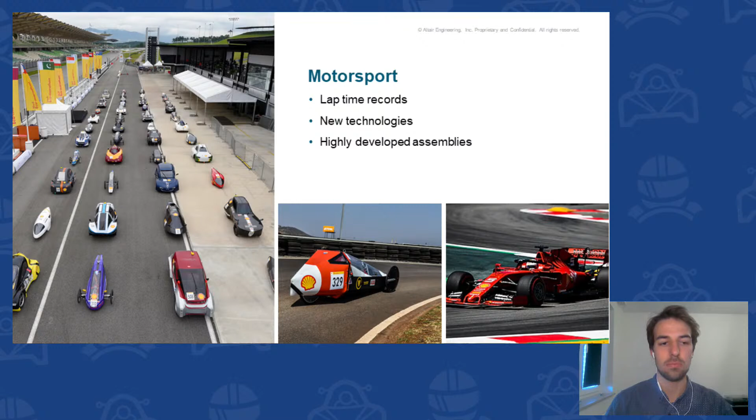The same yields for Shell Eco Marathon. Every year, all the teams compete in events in ultra efficiency classes. Besides the drivetrain, the kinematics, and the software, the external aerodynamic design is an essential part to reach ultra efficiency. Let's break it down. Let's start from the beginning. What is external aerodynamics for automotives?

External automotive aerodynamics directly lead to forces. First of all, the car or vehicle is surrounded by air which flows over it, and this air leads to forces acting on that vehicle.

Drag is a force which acts against the driving direction. It's related directly to fuel consumption, the maximum velocity, and the overall range.

Lift, on the other side, is a force which pushes the vehicle to the ground. It's directly related to driving stability and cornering behavior.

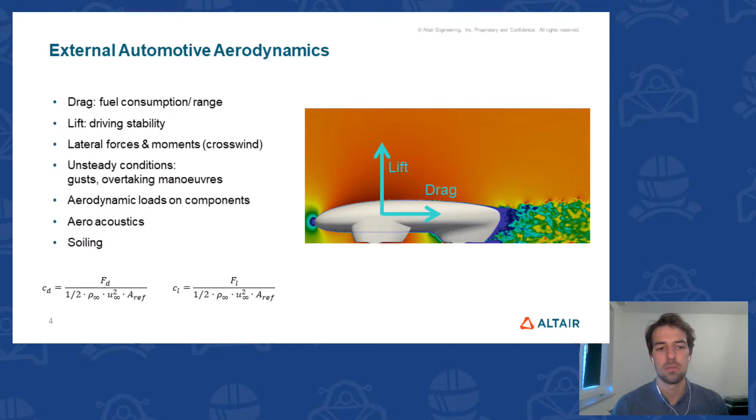40% of the overall drag is gained by proportion and shape of the vehicle, 30% from the wheelhouse and wheels, and 10% is around the internal flow. The underfloor or underbody of the vehicle accounts for 20% of the overall drag.

When it comes to Shell Eco Marathon vehicles, I think the most important factors might be the proportion and shape, and of course the wheels and wheel housing.

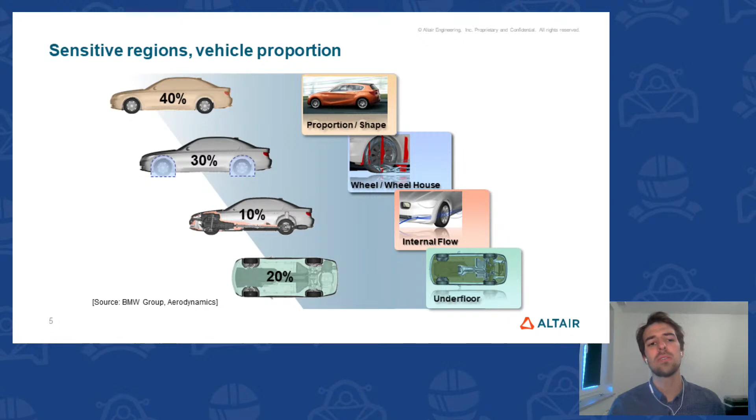But why am I talking all the time about aerodynamics and external aerodynamics? Let's have a look at that.

First of all, EUDC and NEDC stand for emission test cycles motivated by the automotive industry. But that's not the important part. The important part is when you imagine you're driving in the city.

So we're in the first line of the table, and now we're changing the coefficient of drag by 0.01. The fuel consumption changes by about 0.01 liters per 100 kilometers.

The related change in equivalent mass would be about 6 kilograms. Okay, fair enough, not that much.

But now imagine you drive fast, way fast, 120 kilometers an hour, and we change the drag by the same amount. Then the fuel consumption changes by about 0.09 liters per 100 kilometers.

When we relate it to the equivalent mass we gain, it's about 129 kilograms, and I think that's quite a lot.

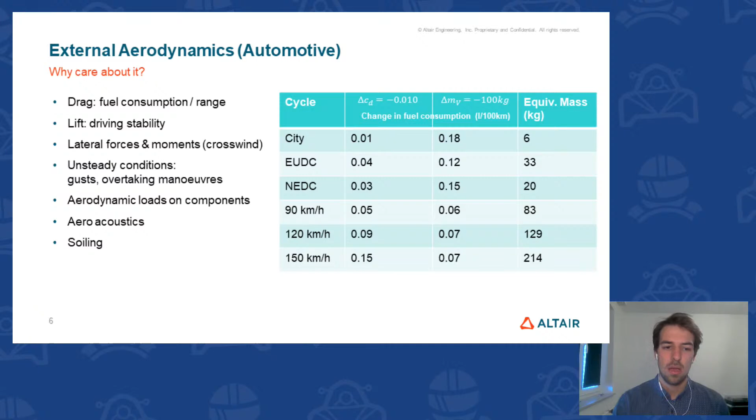Okay, now we've got all this together and motivated. Now the question is how to optimize the aerodynamics of the vehicle.

Optimizing the aerodynamics of the vehicle is quite a difficult task. It requires experiments, theoretical knowledge, experimental data, maybe wind tunnels, and simulations. To achieve an efficient, balanced, and good aerodynamic setup, all of this should be understood well.

Today, my mission is to give you an ultimate insight into lower energy consumption and better performance with optimized aerodynamics. Let's have a look at what this is about in detail.

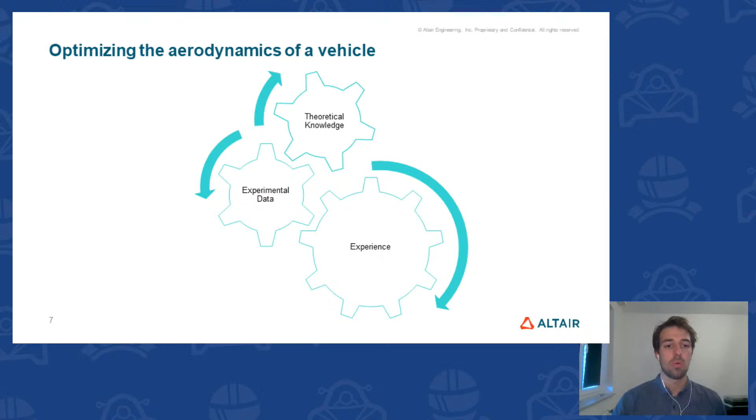Like I already said, optimizing the aerodynamics of vehicles is a difficult task, so we have to take a small look at theory. That's where we start first. I'd like to dive into some basics to get your theoretical knowledge back up and running.

Of course, simulations nowadays are an integral part of vehicle development and thus an integral part of everyday engineering life.

So we'll dive into the practical part afterwards, where I'm going to show you some brilliant software which makes it intuitive to set up a simulation for your own Shell Eco Marathon racer.

At the end, I prepared some results I'd like to show you, and then we'll talk about some common ways to process your simulation efficiently. After this whole session, you should be ready to start with ultra-fast transient simulations.

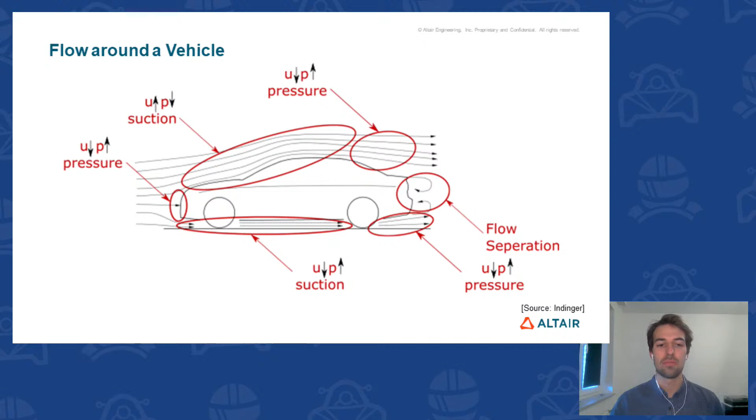The same yields for beneath the car. The air gets pressed through the small gap between the road and the car itself, and the effect of suction also appears. Behind the car it looks way different — there's flow separation, which mainly introduces a lot of drag. But this is only one thing which could introduce a lot of drag. Let's dive into the real reality and have a look at where the drag might be coming from.

The diffuser itself shows nearly no drag at all, because it's a low installation drag device. When we see that all the numbers are placed behind the underbody or underfloor of the car, and remember the numbers from the beginning about how much energy you could save, the question is how to save it — and that's where we come to the underbody of the car. The underbody can be separated into two parts: the ground clearance and pitch, as well as the underbody covers, which determine the flow beneath the car.

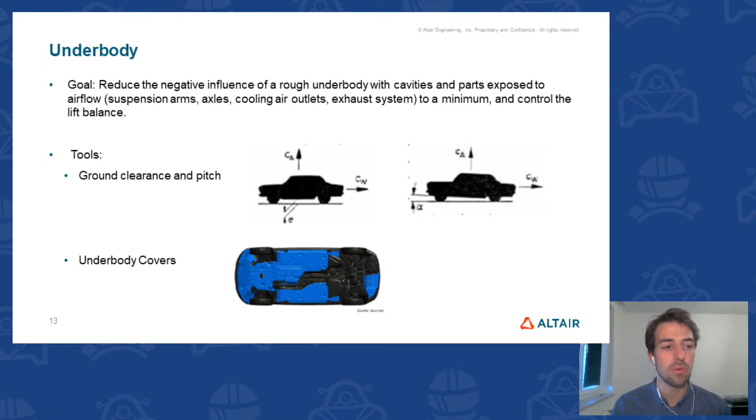Here at Shell Eco Marathon, you don't have that much underbody — the whole car geometry is one in itself. That's why I'd like to speak about a rear diffuser, which may come into account for you. A rear diffuser is one special device, and as I already said, its installation drag is close to zero. This rear diffuser can be built into your body geometry, and a well-designed diffuser can help reduce drag and also lift. In general, longer diffusers are more efficient, but they only work well if you have undisturbed upstream flow, as found on many Shell Eco Marathon vehicles, so that's quite good. You should definitely have a look into this.

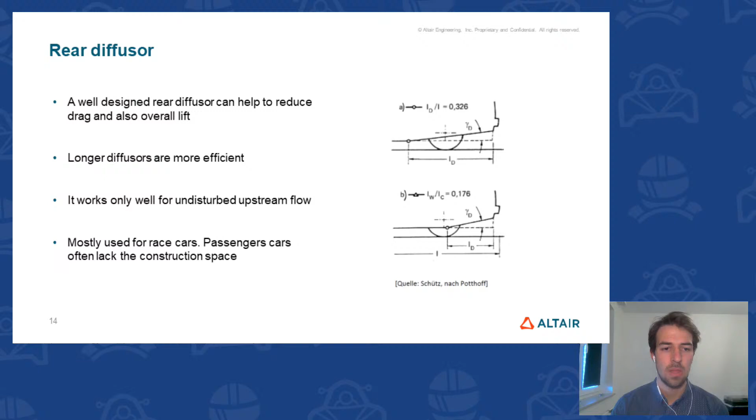Another big thing are probably the wheels. When speaking about Shell Eco Marathon vehicles and looking at pictures, the wheels are quite obvious, and the wheel is super important as well. There's a superposition of flow around the car and flow around the wheels, leading to a complex flow in itself. When we drive forward and add wheel rotation, we add additional effects, so that altogether 30% of the car's total drag is caused by the wheels or the wheelhouse.

So where to attack, what to change? The tire and rim size could be altered. Maybe a closed wheel setup is more suitable to achieve lower drag numbers instead of an open one. Do experiments and run simulations to really achieve a good setup for your wheel placements.

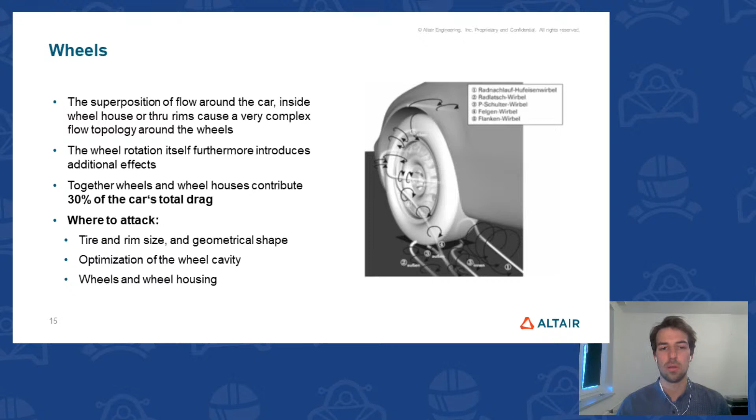Besides this, we also need a little bit more external aerodynamic parts to get the vehicle running. The last point is to speak about inlets and outlets of your internal flow, how to design them. Especially interesting when it comes to cooling your fuel cells, batteries, or even engines. A proper design can save a lot. By using the local momentum added in the radiator or in the outflow, it might even be possible to reduce the installation drag close to zero of these inlets and outlets.

So that's really interesting. Let's look at one example here. On the right, I showed some typical car sketches and some bar diagrams. Version A shows a classical passenger car. We have high drag, you see down the bar diagram, and a good mass flow. The air is entering right in driving direction, against driving direction.

And for example, in figure C, we're using the pressure regions to support the flow. So we gain a lower drag and the mass flow is nearly the same. What I really like to point out here is that inlet and exit with the face in normal stream direction does not necessarily include low drag values. So be creative and experiment, and use the local flow field to really get a good result.

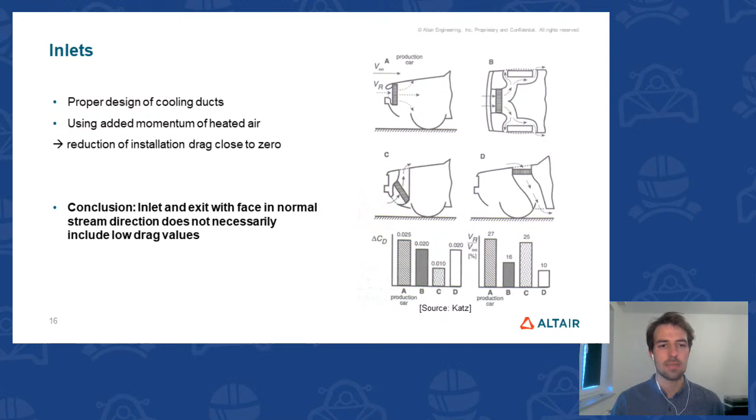As I said, interesting is also the point when it comes to the outlets, the exhausts. The same importance yields for them. Generally, they should be placed in low or good pressure areas as well. But attention here on the outlets: when you have an outlet, you increase the local boundary layer thickness and therefore the likelihood of flow separation on the surface attached to it. And as we already had, flow separation means more drag.

Let's dive into some examples as well. On the right, again, you see some sketches I put on here, not diagrams this time, it's more sketches. In A, you see a conical sheet metal, just a simple exhaust for maybe your battery cooling. The influence on pressure and drag is, I would say, normal, and it's a good workaround. But there is a better way to do it.

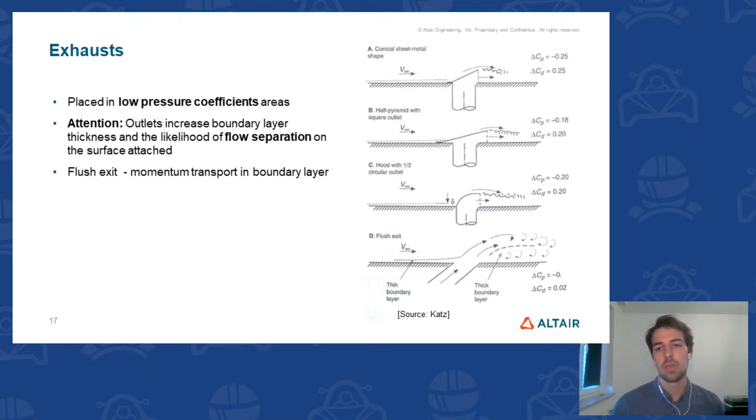For example, with version D. Version D shows a flush exit, which has way smaller influence. So it's nearly no influence in pressure and less influence in drag. And if you place it right, you can even use the fact that it improves momentum transport to the boundary layer. This is how the reality looks like, and due to that we got that roll up now.

Now it's interesting, and there's a question: how does it look when it comes to simulation? And why should we use simulation at all? And what are the common methods? These are my questions you ask yourself now. And to motivate it, I just put up some numbers here.

So why should you use simulation? First of all, money. Of course, the wind tunnel is expensive, the prototype is expensive, the automotive industry spends a lot on these experiments, and therefore computational fluid dynamics would be a good alternative. But for you as a student team, a big point as well is there's no wind tunnel at all. Or better to say, some of you who may have one, they can't use it all the time to really have a dynamic iteration process. So computational fluid dynamics is a flexible and fast alternative to wind tunnel experiments, and CFD offers almost unlimited possibility for the analysis of the flow field.

You can just do it at a computer, zoom around and have the pressure values at a totally different location. In the wind tunnel, that's not possible. If you set up the experiment like this and then you think about having a different number or scalar noted or recorded, now it's gone. So that opportunity you always have using the computer. Coupled with the computing power of today's computers, CFD makes it possible to develop complex aerodynamic components and further increase the performance of the vehicle without building and testing every design option in the wind tunnel.

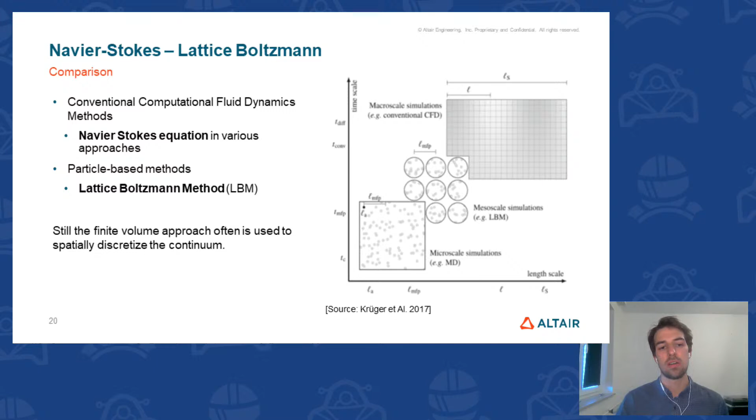In both the Lattice-Boltzmann and Navier-Stokes approaches, we often use a finite volume method to spatially discretize the continuum. If we now take the comparison from the theoretical view to a practical one, there are some more advantages which come into account.

In the direct comparison of the methods, both can be used to describe aerodynamics, so there is no difference at all there. But there's still a lot to point out.

The Lattice-Boltzmann method is transient and explicit. The Navier-Stokes is implicit and mostly steady state. Because the Lattice-Boltzmann method is transient, we have way more accuracy and it's possible to design aerodynamics more exactly, especially when it comes to high-end efficiency. It's even possible to look at aeroacoustic fluctuations in that continuum.

In Navier-Stokes, when it comes to steady state, all transient information is averaged and summed up into one single frame or shot of time. So it's not even possible to capture all effects, for example the wakes around the tire, which we saw in the slides before.

This is maybe a big advantage of Lattice-Boltzmann when it comes to mesh. Down here you have some mesh examples shown. The surface mesh for Lattice-Boltzmann has really low requirements - it's quite simple and not as detailed as the high-quality trias mesh, where around the edges in Navier-Stokes we have small tria elements with a much less skewed angle, and the quality is much higher.

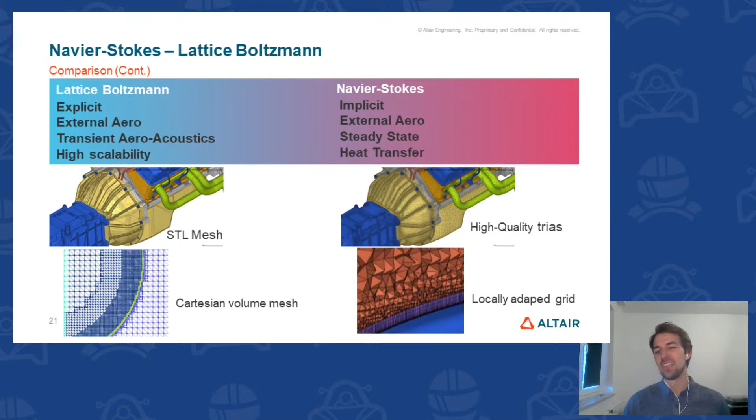Now you're probably all asking yourselves, what really is this Lattice-Boltzmann method? Let's jump into some details.

So we have one equation, the Boltzmann equation. It is solved on a discrete lattice. The lattice is constructed out of voxels, like that one on the right - these small voxels or cubes.

The solving process is separated into 2 steps: the streaming step and the collision step. In the streaming step, the particles stream in their determined direction. In the collision step, the particles collide.

New velocities get computed, and possible particle velocities are discretized into these 19 directions - so we don't allow any velocity, only these 19. This is the step where we discretize.

This D3Q19 velocity set means we have 3 dimensions and 19 velocities for the particles to stream at. Due to this discretization, we keep the transient nature of the flow inherently respected, and the physics behavior is determined still only by the viscosity of the fluid.

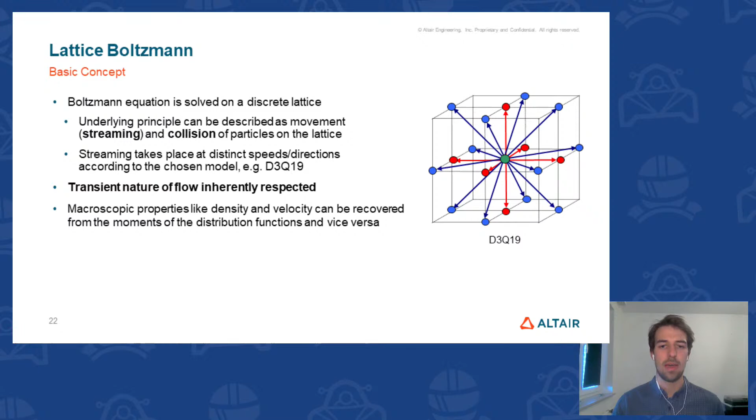Just to round this up, let's have a small look at the iteration process itself, and then I'll leave you to the more practical things as we end the theoretical lecture.

The Boltzmann equation sets the relation between the density of particles and equilibrium density. In the collision step, which we already covered, the discrete velocities get determined. In the streaming step, they stream, and the Boltzmann equation brings that into account. Based on the equation, we can determine macroscopic moments like velocity or density directly. So the solutions covered by the Navier-Stokes equation are also directly solved here in the lattice Boltzmann equation.

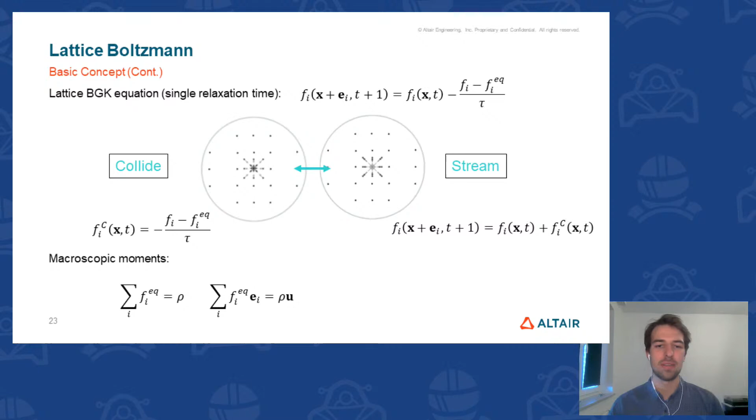Let's sum it all up. We got low surface mesh requirements, trivial volume meshing, and we can do transient simulation, which should be even more interesting in regard to high efficient external aerodynamics.

Tailor-made tools should be used to follow this kind of simulation pipeline, which is always in this general way. The preparation process is first, where we prepare the surface, and that we will do in Inspire Studio. The pre-processing, the setup of the simulation, we do in Virtual Wind Tunnel. The solving in UltraFluidX, and the last, the post-processing of the results, in AcuFieldView.

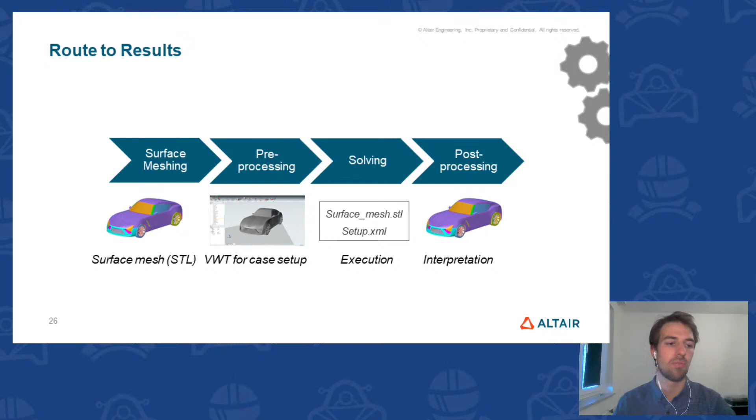Now you ask, what are these softwares all about? Inspire Studio is a software where we can go from design to manufacture all in one single easy-to-use platform. It's intuitive and easy to learn, with a nice user interface and unlimited construction history. We have free-form shapes, which I really like, especially when it comes to aerodynamics and streamlined contours, which are not as simple as rectangular shapes and circles. There we have continuous NURBS geometry, where we can easily work and adjust every small part. We have a sketching environment to create and edit 2D curves, and we can discretize these surfaces, which then leads to a smooth transition to Virtual Wind Tunnel.

Virtual Wind Tunnel is the pre-processing step. It's a vertical application tailored for external aerodynamic studies, designed with the user's needs in mind. The graphical user interface provides easy access to problem definition and solution strategies, and is built up in a kind of streamlined workflow. We have automated and customizable report generation, so that after every simulation run it provides a consistent method for design evaluation. From Virtual Wind Tunnel, we directly export the XML file to UltraFluidX, where we then run the simulation.

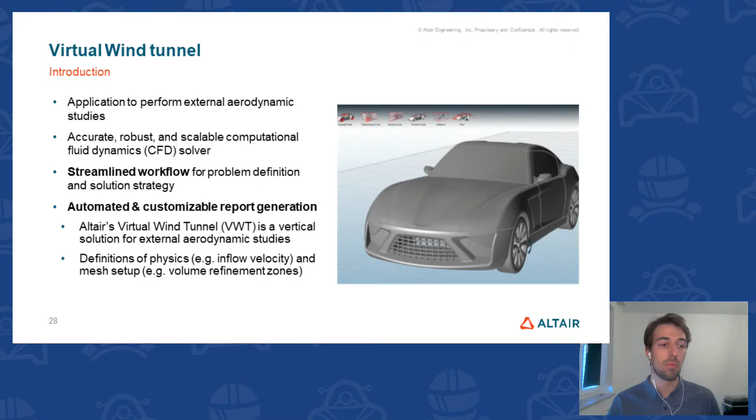UltraFluidX is the main heart, or the main part, of this whole simulation pipeline. The tool predicts the aerodynamic properties. This technology is based on the lattice-Boltzmann method, which allows transient simulation and ultra-fast transient simulation results, leading to super nice turnaround times so you can adapt to every design change immediately. It's optimized for GPUs, you heard right, GPUs, to deliver extreme performance and gain a lot of potential.

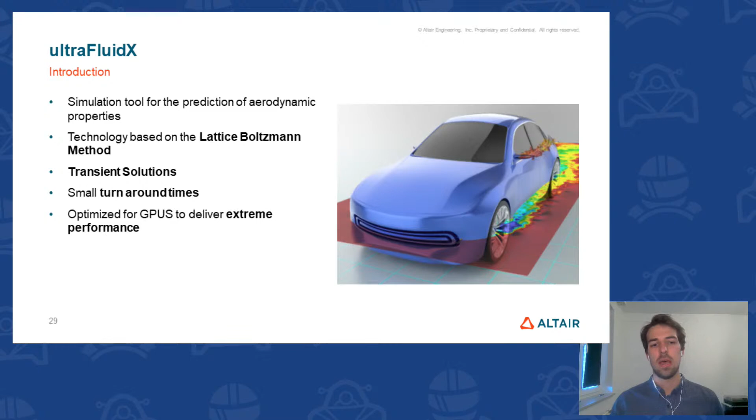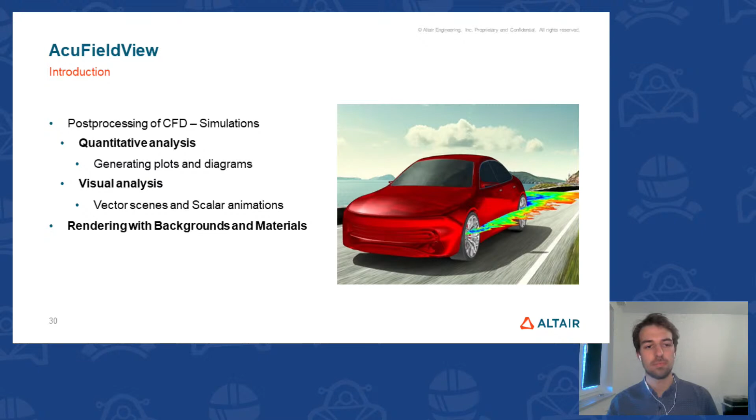The post-processing we do in AcuFieldView. We can either do quantitative results by generating plots, diagrams, and having a look at the boundary layer, or visual analysis like vector scenes and scalar animations. And of course, the fun part is not short either—there are renderings as well, where we can apply materials and backgrounds and get nice pictures like here on the right. But let's have a look at how this really works in detail.

Right here, now you should see my screen closely. I've prepared a nice body geometry which was sent in by TERA Fennek, the Shell Eco Marathon team from TU Graz, who were so kind as to send it in for demonstration. First of all, I'd like to take you into the program, how it's structured, and how the main control works.

So if we click the mouse wheel, we can rotate around the center of gravity. If we move it, or want to translate the image or the object, we can use the right mouse button. To select anything, we just use the normal left one. Up here you have the sketching mode, where you have a lot of things to do.

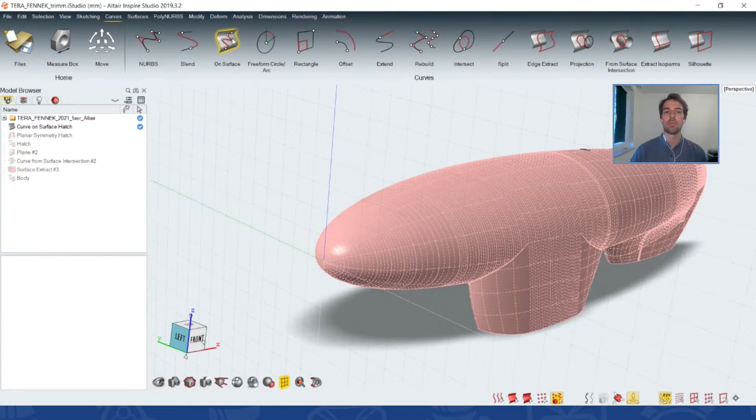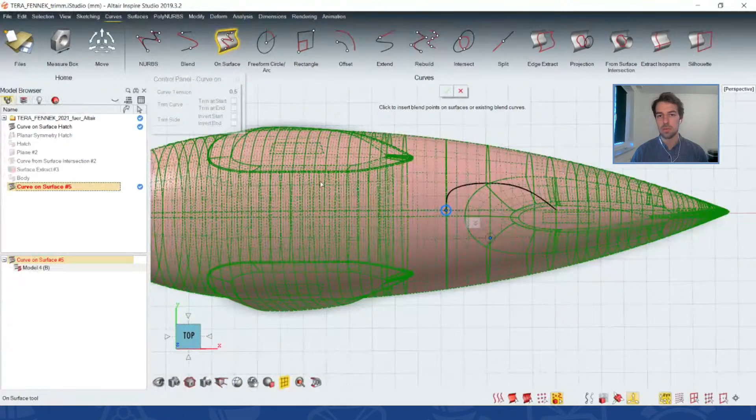Starting from this one, maybe to make it a little bit easier, we may want to create a hatch where the driver should be able to have his head in, so he doesn't have to lay down the whole time. Right now the driver lays here, but to see the road a little bit clearer, it might be interesting to have a hatch or lookout so the driver gets more control.

So let's do this. We have one curve already initialized up here. Now we need to modify it to get it to a really 3D model. We click on modify up here, and now we can scroll through here and look for the symbols, and there we find symmetry. That's what we need.

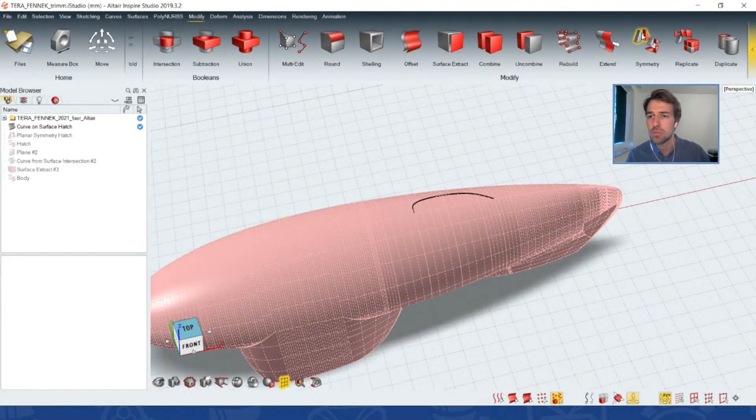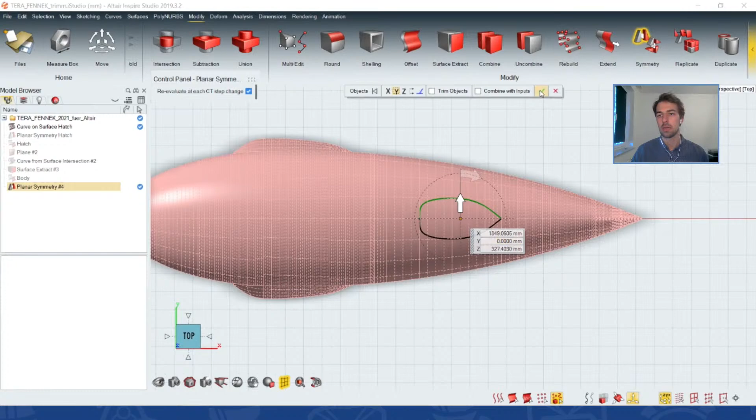We'd like to mirror that curve on the Y plane. Now, when we just have a look from top, you see it's on the wrong way. So we click here on the blue point, and now we can enter the coordinates where the symmetry plane should be placed. We'd like to have Y0. Easy it goes, there we are. Okay, done. We symmetried the curve.

Now we have, I would say, a contour where we could start to create the hatch from. It's a little bit streamlined already in the back, which allows the air maybe to go around a little bit smoother.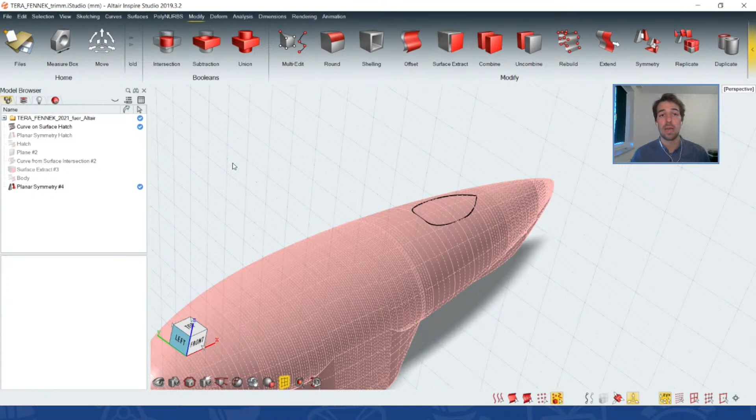Okay, now we'd like to extrude that one. Therefore, we can go on surfaces and then on extrude. Oh, now we already see some popping up. I zoom in here quickly to just the curve. Okay, we click that - oh, doesn't work. We do it in here. You easily can do it also in this side here, because then you have a little bit more control, and you don't have to deselect the parts again when you are in the wrong part.

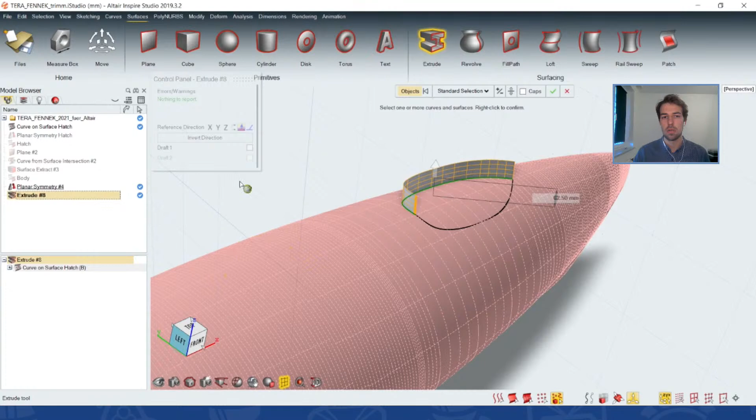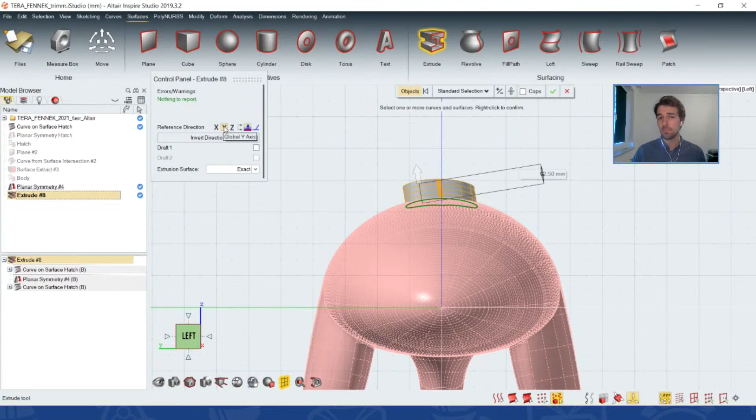Now I select the other one as well. There we are. When we now look from the front, you see it's not even, it's not symmetric to the y-axis, and this is because we didn't select a reference direction. So I think they make it normal to the surface in the first place, but now we can easily correct it by clicking Y.

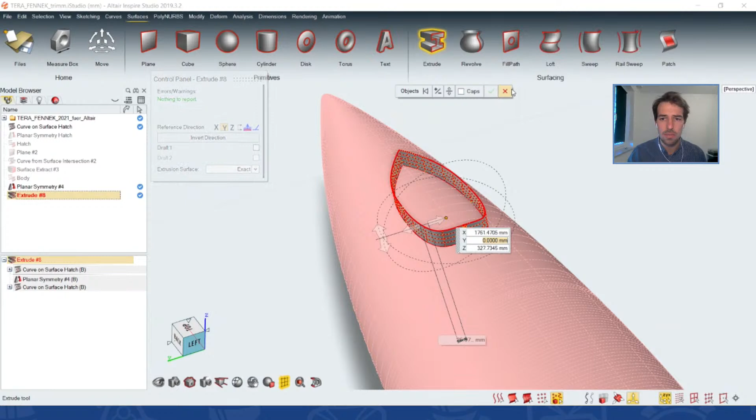Or just move that point further down here. Now we got this one. There we have the Y, which we can set to 0. And now we are, what we've selected here - oh, we have something else selected, I see. Let's do this one again.

We go from here, click on extrude, click these files. Now I got them. Okay, that was the reason why - because I selected already a geometry from that example model. We'd like to extrude the surface. Now we got it there, and this one we got it as well.

Great. Now still we have the problem that it's not really in the right direction. Now we can move it easily, turning backwards, and then get it controlled. I already prepared that, so let's have a look into how it should look like.

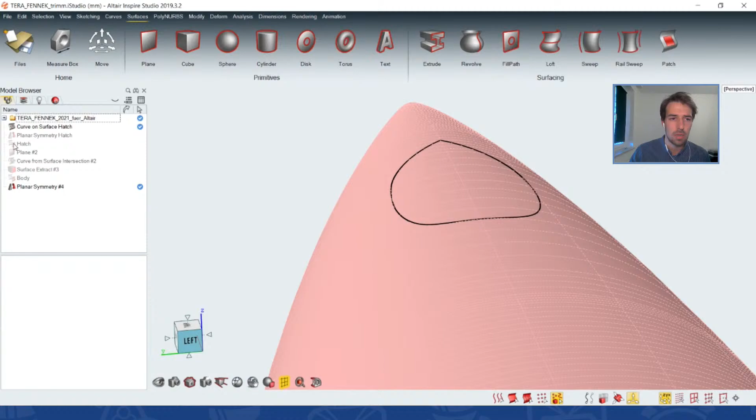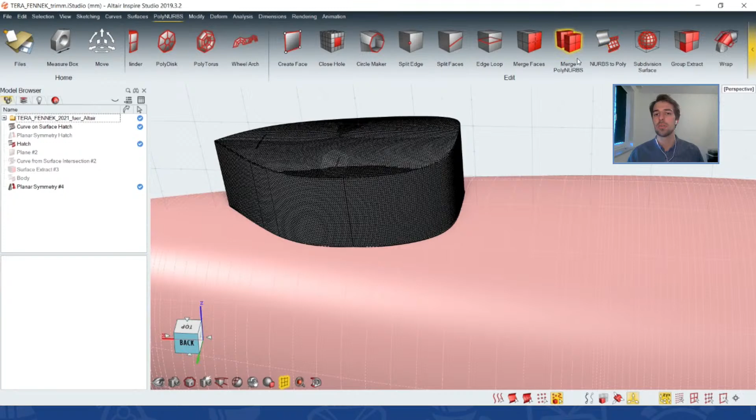Here's the hatch. And what I've already done as well is to mesh it, to generate from the poly NURBS a mesh from this one. Therefore you click on poly NURBS and go on the NURBS to poly option to create this mesh. There you also have the possibility to choose a tessellation and all this. And then you easily end the session and click on Save As to export the model.

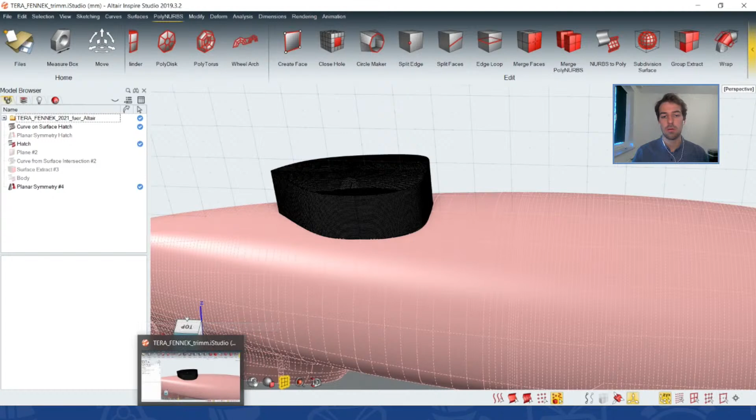Then we go from the pre-processing step, or from the preparation step, to the step where we set up the simulation. Here I just took the original model again and loaded it into the virtual wind tunnel with this import option. The controls in here are the same as in Altair software, and it's quite common to familiarize with them, because it's really just these three options: rotating it with the mouse wheel, right click for translation, and left click for selecting.

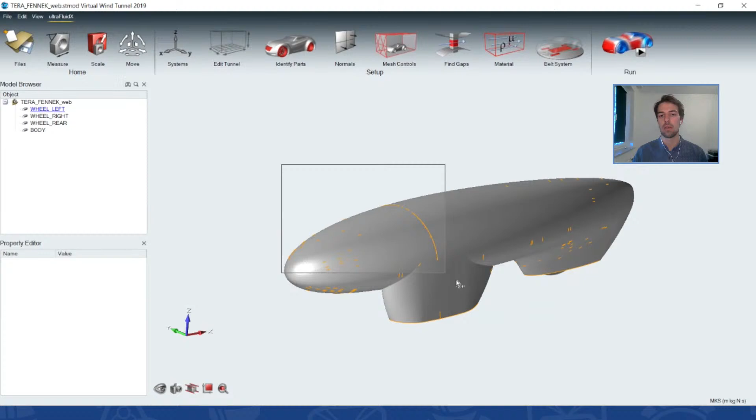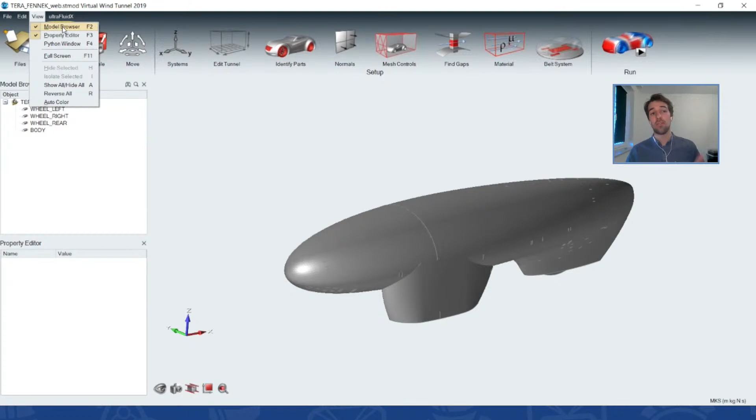Up here you have now the streamlined workflow I showed. So first, maybe here are some measurements and scale options to move the object and interact, and here are the options offered by the virtual wind tunnel. First, I'd like to point out that it's really nice to have the model browser activated and the property editor as well. This shows us an overview of all parts and the properties of the parts when we assign them. Let's start with editing the wind tunnel.

Now you already see that the virtual wind tunnel has already generated a nice and comfy wind tunnel for that object.

First of all, I like to set the inflow condition. In this case, I like to have it at 40 kilometers per hour. I don't know how much this is in meters per second right now, so I just enter it like this. No problem, the software directly transfers this kilometer per hour value into meters per second SI unit, which we choose down here. You could also alter it to different other things if you're in an imperial system, something is just adapting.

Now we like to check the dimensions of the wind tunnel. We could change it here, but I think they are all right for us now. Okay, wind tunnel in place. If we like to move the car a little bit backwards, we could just use the move option, but I think this looks good in regards to distance to the inlet.

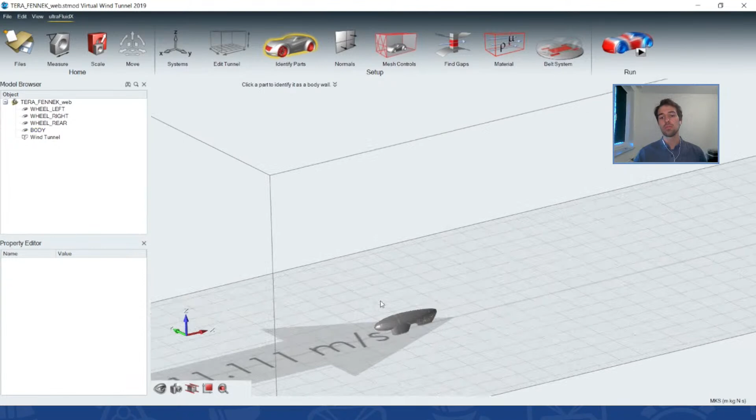Now it's time to identify parts so Ultra knows what really matters, and what is the part and what's maybe a wheel or something else. Therefore, we just click Identify Body. Body, that's one, okay done. Now I unblend the wind tunnel, which you can do here by just clicking on this icon.

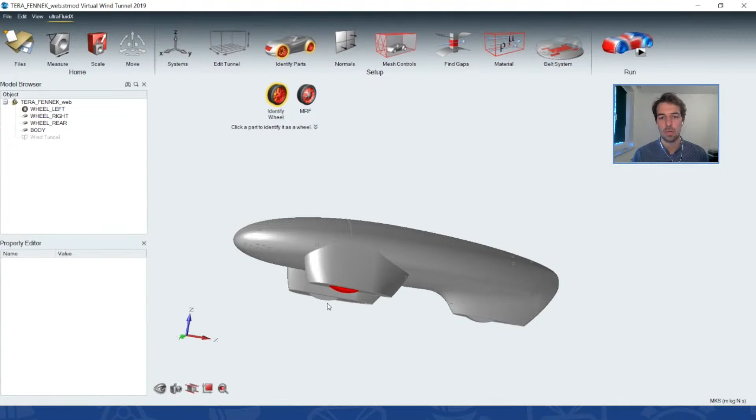Now we like to identify the tires. So we click on Identify Wheel, and now we click on the wheel. They pop up in red, and as well you recognize, right, the symbol here changes as well. And when I go through them, they now light up a little. Okay, going back to a good view.

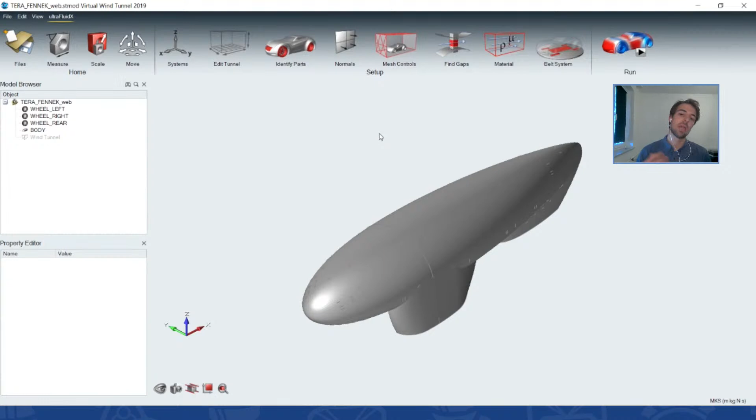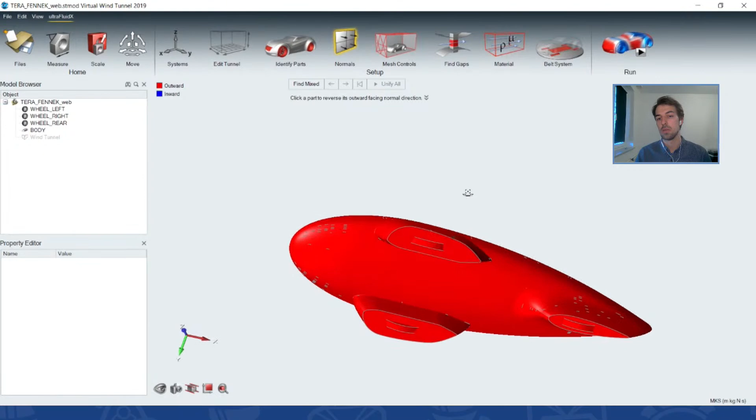It's also important to make sure that the normals point outwards, because Ultra is determined on this normal information. It determines where the fluid should be, whether outwards the geometry or inwards the geometry. Therefore, just click normals. Normally, all the parts should light up in the color which belongs to the normal direction, but if not, you can just select the parts by using the mouse tool I have here. We see already that we have all outward-turned normals, so we're good and ready to go. The wheels as well, as you see here.

Okay, the pure simulation is set up. Let's put it back in the wind tunnel. We could run this now. The thing is that we now have a unified mesh. We have the same voxel size everywhere.

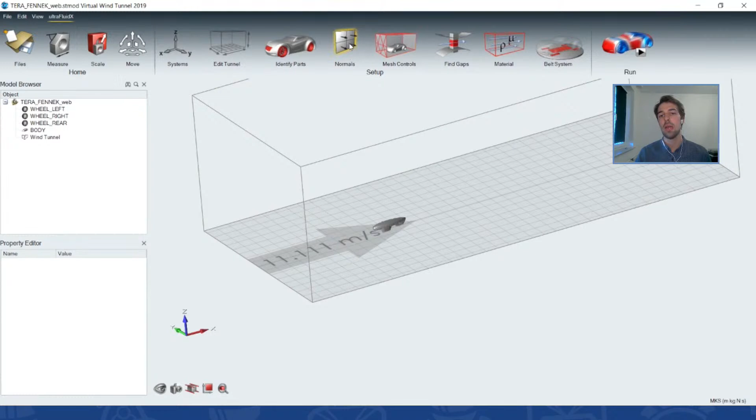To have a little bit more of an adaptive one, we could use some more mesh controls. The far field voxel size, the one in the wind tunnel, is listed here. It's at 0.2 meters, which I think is quite a good value to start with and to have a look. The other things you can put here would be a rectangular box refinement, offset refinement, or even a custom refinement when it comes to tires, mirrors, or everything else.

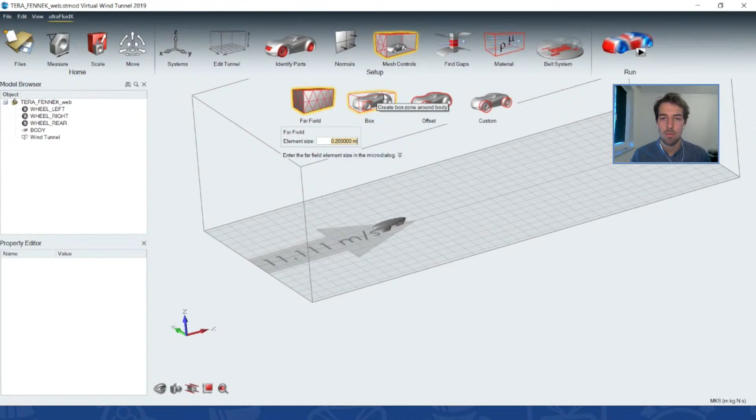So let's do a box refinement for that body. You click on the box option and then click on any location on the body to create a refinement box. It's quite helpful to have this information here. Thanks, refinement done. We can alternate the level a little bit. We just had level 0, that's the wind tunnel, so we would start probably with level 1 to make it a smooth transition.

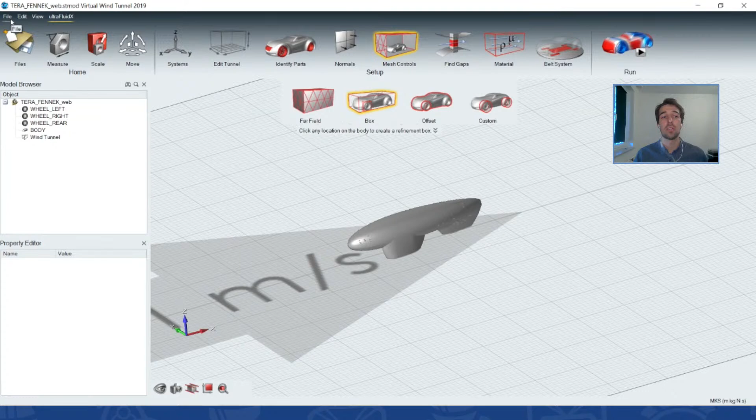The offset one would work similarly, as well as the custom ones. I prepared this already, and I would like to show you the option here that you are able to import mesh settings or simulation settings when you do a design study. You don't have to set up the simulation all the time again. So you can just load in the new geometry, and then go to File, Template, and import whatever you like.

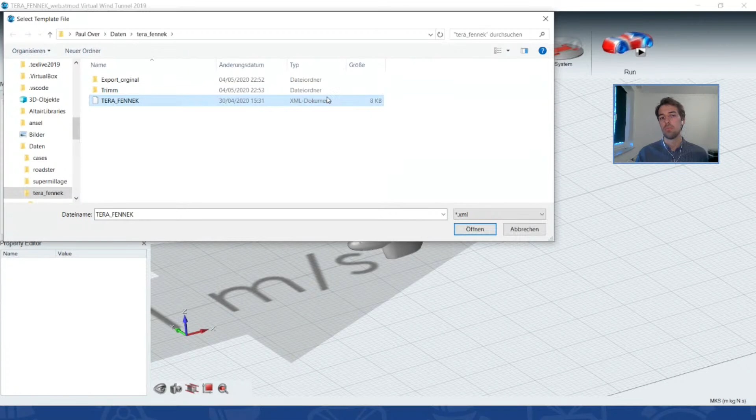Also, you can export the settings, but we'd like to import them now. I take the full one. So here's the full simulation. It's an XML document where all the settings are displayed for Ultra, and we just click on open. Oh, suddenly, tick, it's loaded, and now we've got some mesh controls imported.

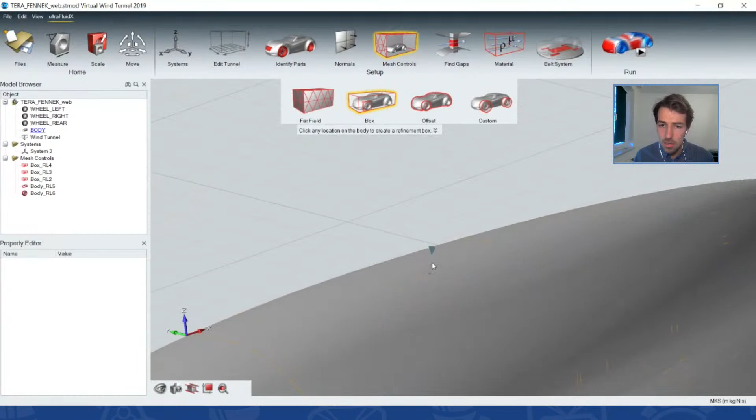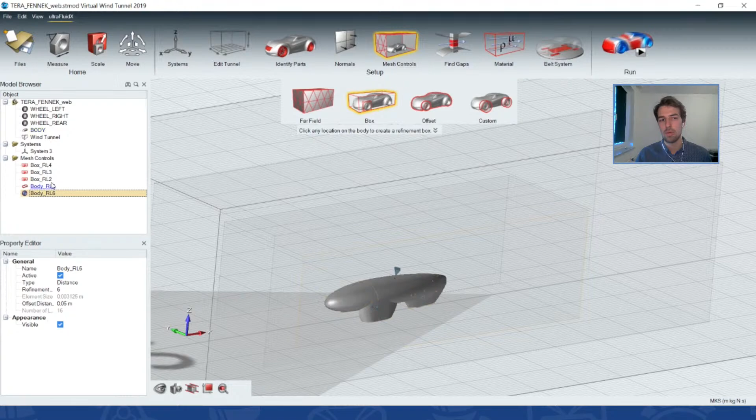Here we've got now the rectangular shapes and the offset shapes. The offset refinements are shown due to this, you see now the offset between this and that. Well, I can maybe just highlight it a little bit more. Oh, now it gets stuck. Yeah, that's how they are made. So the first one, the upper one here, is a body one, and the other one is a part-based one, which is really just directly on the body. The other one is rated on all parts.

Having the mesh control done, and I really will come back to this and point out some guidance material in the later slides, we need to set up the material. The material determines, of course, how the air is, how heavy it is, how viscous it is, what temperature it has. And here we need the specific gas constant again, because in particle-based solving, this is the main important factor.

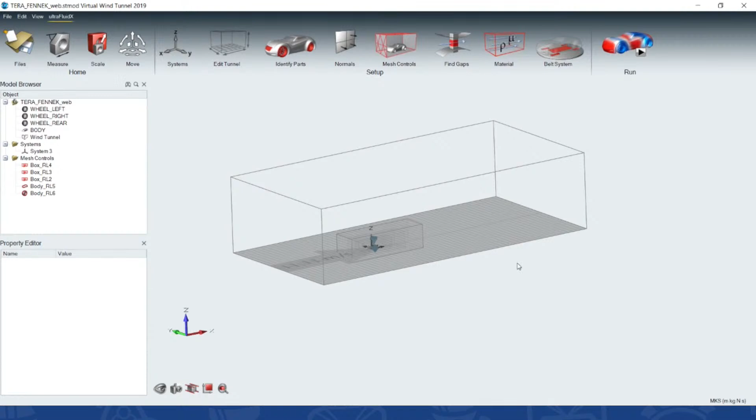When we get it all done and we are ready, we just click on the play button here to export it to ultraFluidX. We can put in a name, check the runtime - I think it's computed automatically. Every time you see these flashes, you can just auto-compute them, and then you're ready to run. You export the mesh, you can select that to have a look at your mesh, and then you can export it, and that can be loaded up onto the cluster to run on the GPU cards and perform the simulation.

So let's dive back into the slides to really have a look at how we could perform a good simulation, and what are some key facts we should keep in mind to achieve a good simulation setup. I'd like to give out some iteration values where you could easily start when you do your own ones. So let's head into the PowerPoint presentation. I think you're already there. I'm still on the program, but I'm also back there again. So let's hit to the next slide - how to set up a CFD.

Let's give some facts. First of all, I'd like to regather the surface mesh requirements quickly. We only need triangular elements. The element quality is of low importance, and part intersection is allowed. That makes it quite helpful, especially when you have cut problems or some small interactions. Ultra is fine - it only needs the normals of the surface to point outwards. What's recommended is to have a closed and watertight mesh, but in some cases Ultra will try to handle it anyway. If there are small cracks in the mesh or geometries due to cut problems, it doesn't really matter for Ultra - you could still try to run it.

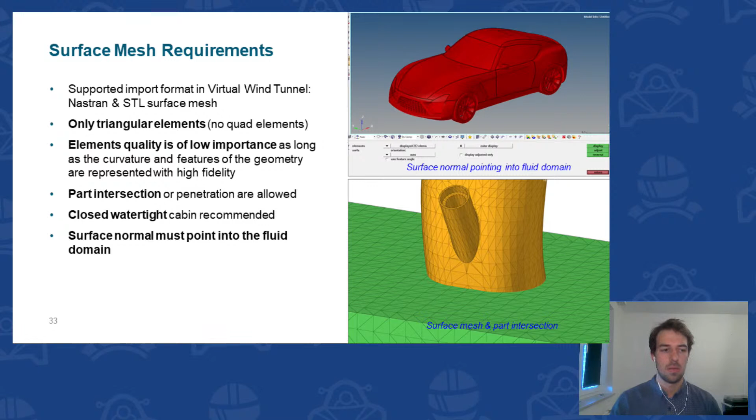Now we import it to the wind tunnel, and we are setting up the computational domain as well. Here's some guidelines. First of all, it's important to understand that voxel size and number of iterations determine the computational time significantly. In general, 30 to 50 flow passes are suitable to reach convergence in automotive setups.

One flow pass refers to the time it takes for a single fluid particle to completely stream over the entire body of the car. So if we take the coarsest - what I really point out here is if we change the coarsest voxel size, we can have a huge influence on the computing time itself, especially for the iteration steps.

When we go from 30 to 50 iterations, we extend the computing time significantly. The coarsest voxel size in the far field should be around 0.2 meters to 0.05 meters - so 20 centimeters to 5 centimeters. For me, 19.2 centimeters is a good number. You will figure out later after you set up your simulations, after a while, why it's a good one.

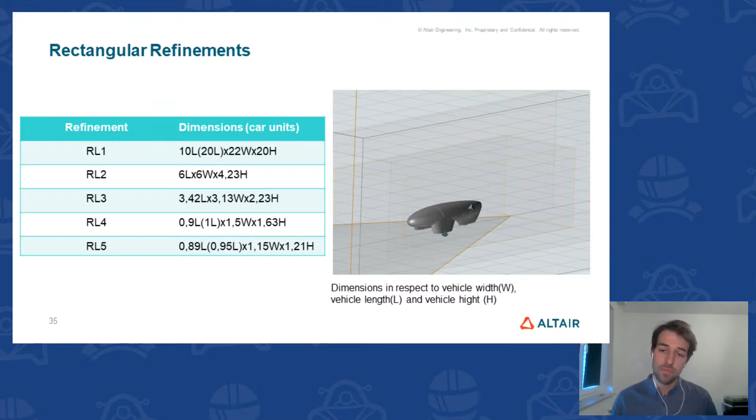Therefore, we could either use offsets or custom volumes. If we use a part-based refinement, an offset volume, these might be of interest when we have high shear parts that are suitable to place them on. Here on the right, the whole body shows quite high stresses, especially on the wheelhouse.

Those regions with these high stresses show a lot of turbulence appearing close to the body, showing a highly transient character there.

Looking at the picture on the left, we see the transition from the coarsest mesh at the top to the fine mesh wrap kind of thing around the body. This is really where it comes to the point that we only have a cubic size mesh here, which is totally Cartesian, and then as we get closer we get a wrap kind of thing, which is basically produced by the part-based refinements.

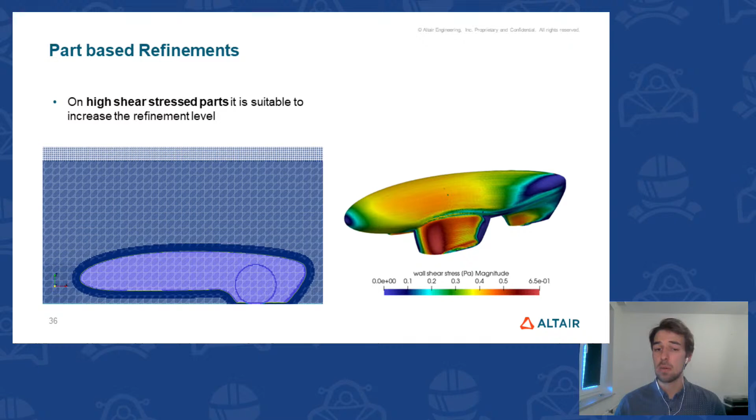Instead of defining these wraps, we could also use a custom mesh or custom refinement control, like in this part here. The predefined custom refinement zones can be adapted to new similar geometry using morphing, like in Inspire Studio. There's an option where you can, for example, generate a mirror volume to refine around there.

Or in the animation up and down, you also have the idea of making the tire a custom volume control. With this extended region, you can fit in the whole tire wake, and in the end you gain more accurate results and probably get a more efficient aerodynamic setup.

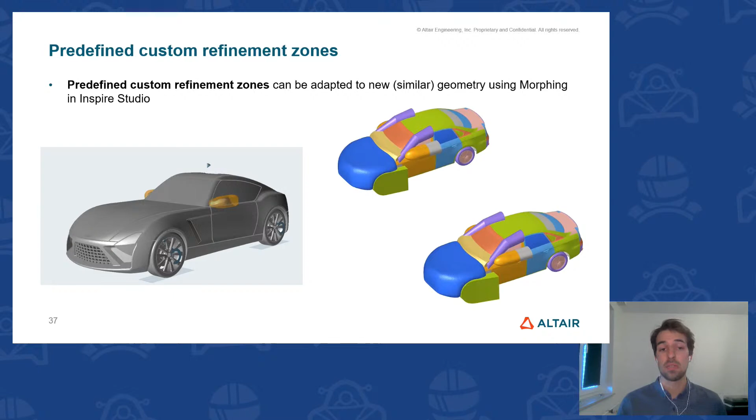Regarding tires, there might be some additional information interesting for you. The outstanding wheels often shown on Shell Eco-Marathon vehicles, and their influence should be analyzed in more detail. I would advise using Altair Radioss, the solver, to create deformed tires, and then get your aerodynamic package even more realistic and in the end more efficient.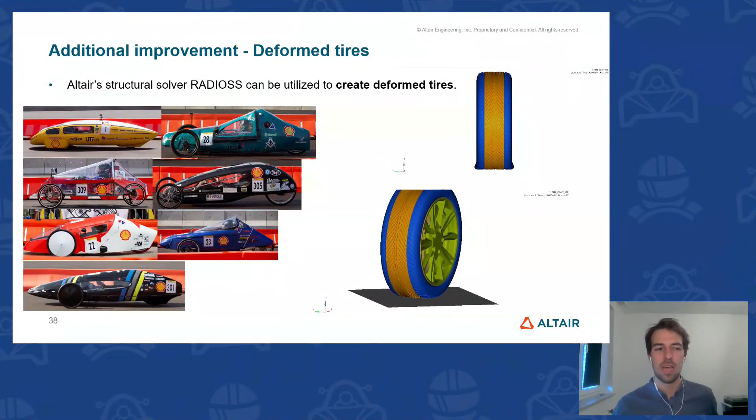But now let's jump back into some results and continue with the interesting part.

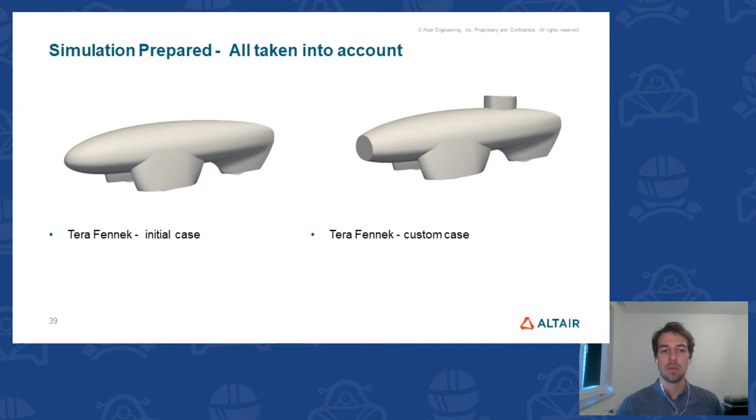So I set up a simulation, like I said, with the idea of having this lookout for the driver, maybe a hatch or something in the custom case, and a flat front bumper to add a cooling inlet, maybe for the battery or fuel cell. I thought it's maybe a good idea, so I ran a simulation, and now we'd like to have a look at the results.

Now we have a look at how the simulation procedure went. It's good to look at the progression of coefficients. In the first time steps, we have the launching sessions here in the images, ending up with a high peak. This is where the flow got accelerated from 0 meters per second to 11 meters per second.

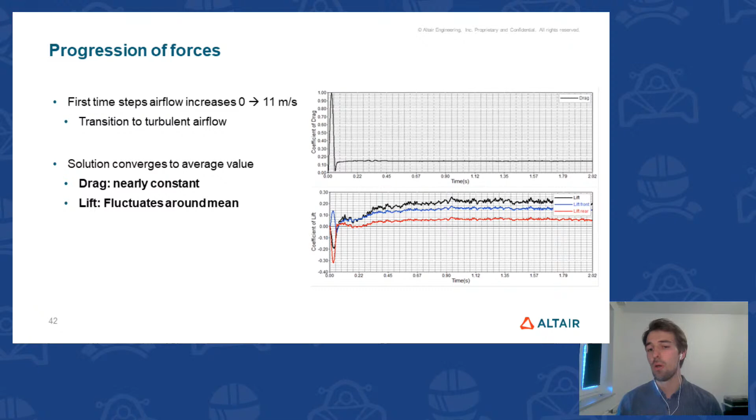Then we already see that drag is nearly constant; the solution, I'd say, is probably convergent. The lift fluctuates a bit more around the mean value, but in general, the conclusion is that the simulation is worth post-processing because the results look quite good.

Okay, let's dive into the drag and downforce thing. Taking the average for the last iterations, we now have the coefficients of lift and drag available. This coefficient of drag differs about 0.023, and the lift about 0.354.

So both of them got a bit high. Now we have the animations here on the side, and you see that the flow is really starting to flow. It's a transient image, and when it's flickering in green, that's the start where the flow begins.

Then we see it building up more and more. This is how the results look due to this transient code method of Lattice-Boltzmann.

As we see in the animations, most influences are coming from the front bumper. We see the big pressure zone up there, and especially here the velocity displayed, we see low velocities there. Also over the roof contour it's way more turbulent, especially behind this hatch area.

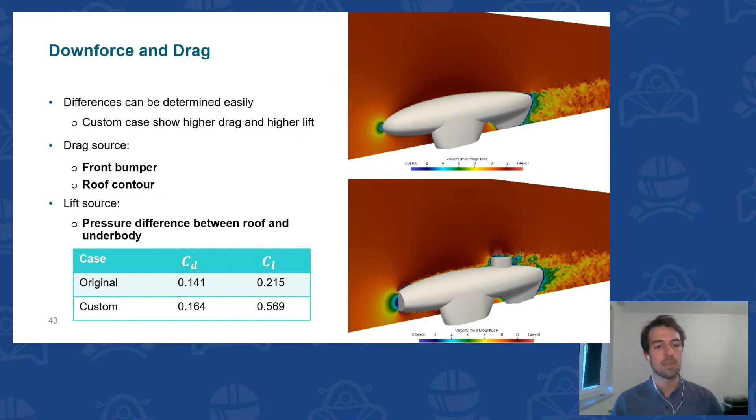To confirm that assumption, let's look at some less visual results, more quantitative tools. The sectional drag, of course, is part of this study today.

The sectional drag is generally created by slicing the vehicle up into 100 sections, or more if you choose. I did 100 here.

For each of these sections, drag and lift get computed. High influences can be spotted easily by peaks.

For example, in the custom case here on the right, we have huge drag at the front bumper. You can spot it - we just start slicing, and the first slice already has a huge impact.

As well, the increase of lift, what we see at the hatch kind of lookout thing up on top, we see the blue bubble which was building up.

When we now look at the custom case and the initial case, we see that in the front tire housing, the wheel housing, the drag value is also quite high around that region. We should talk about this one later.

But first, I'd like to introduce another version of these sectional drag plots, especially when it comes to the cumulated representation. The cumulated presentation doesn't display all values on their own.

It's summing up all the slices until, with the last slice, we reach the results of coefficient of drag and lift, the average values we get as information from the results.

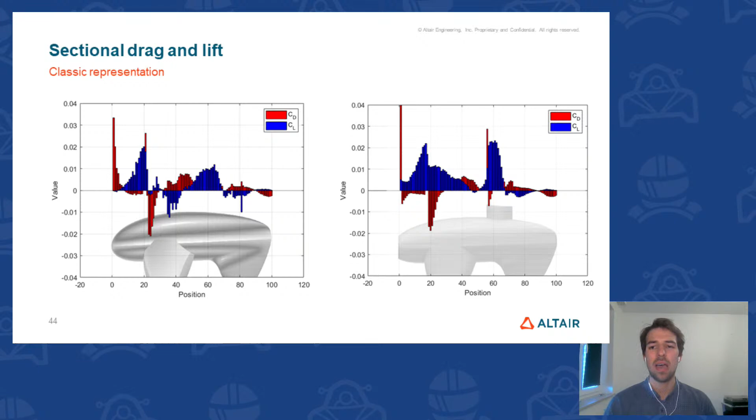Here, the strong gradients indicate the major influences. And it's nice to see that also in the hatch and lookout area, in the custom case on the right, we have the highest gradient there.

Okay, we got the cumulative representation, and we have the custom case, which is on the right, where we have a strong gradient. In the cumulative representation, we have to look out for strong gradients because they indicate the major influences.

Offset in drag we can also predict quite easily. We start with the value in the custom case, which is way higher than the normal case. And changes in the roof contour imply huge lift changes, like we see the lift in the custom case just roughing through the roof. Maybe the body changes I performed haven't been that suitable.

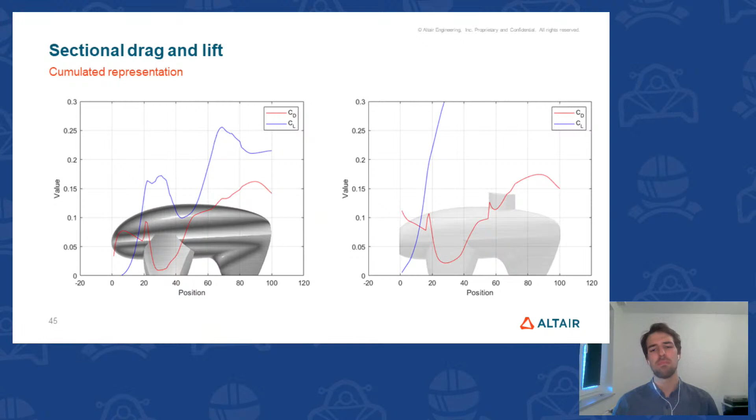Let's determine this in the last step by looking at the drag per part values. Here we see that in the initial case, the body determined 90% of the overall drag, and now in the new custom case we have 91%. So we can say these changes I performed are directly determined by the flat front bumper and this hatch lookout thing.

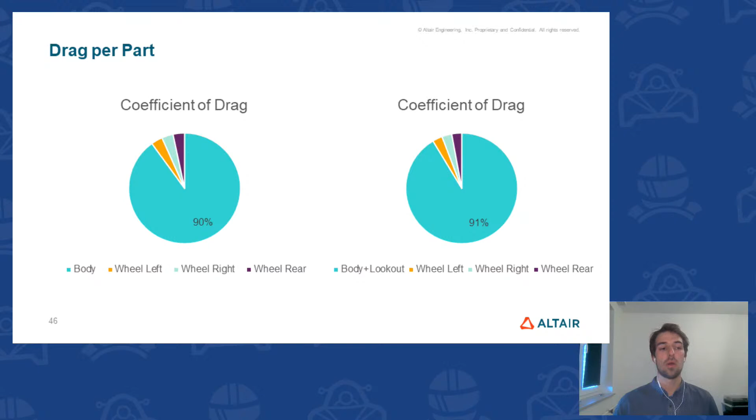So what are the lessons learned from this one? First of all, maybe the design was not that suitable. So it's recommended to go back to the last iteration, to the flat or more streamlined front bumper option. And also the lying driver position allows a more streamlined design.

Finally, there are some things you should definitely take home, what I really like to point out here. Learn from the tests you made. Improve and try new concepts, like this bio-engineering thing. Why shouldn't you try it? It's a fast turnaround alternative, and maybe you could spend these hardware resources to get some more clearance there.

Use the post-processing technique I showed. Do not only trust in nice and colorful pictures, these animations. I know they look quite good, even in these transient cases, but the plots and diagrams really show the true findings and the true things you can say about your design approaches.

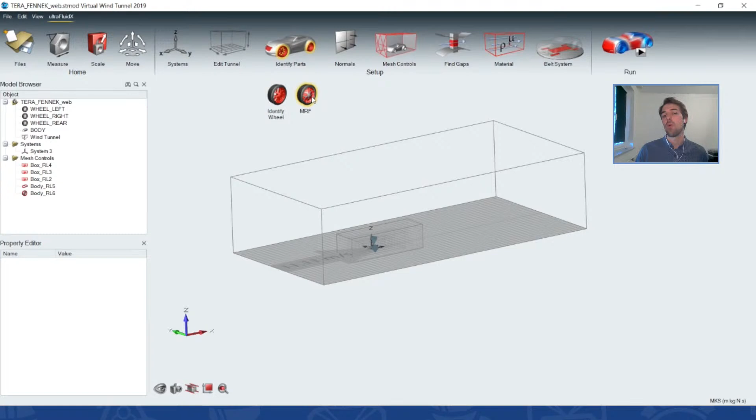Another point would be to identify wheels, what I already was talking about. We have the wheels here, just the rims and the tires. Here you see - it's not really clear - that we have the rims, the tires, and then the small gaps between them are closed. That's where you should place the custom volume to have the multi-reference frame interaction on the particles there.

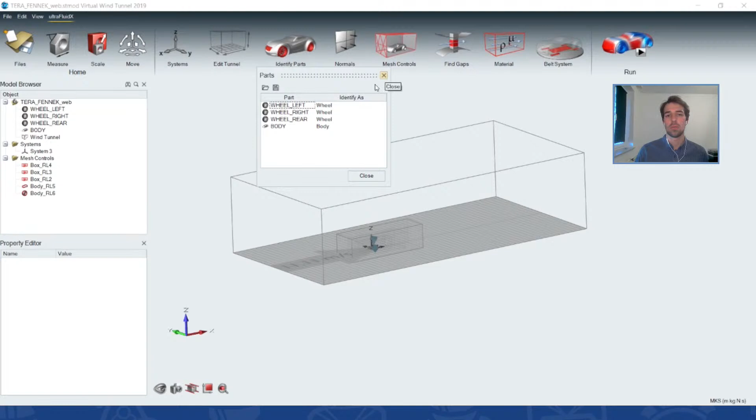So I think this is a good roundup for all the things. Here's another good option: when you look there, you get shown which part is identified as what and how it looks. Imagine now you have a huge assembly, around 60 parts, and you sometimes lose yourself - it's a good one to refer back to. I hope this makes it way clearer now. Thank you. Yes, thanks so much.

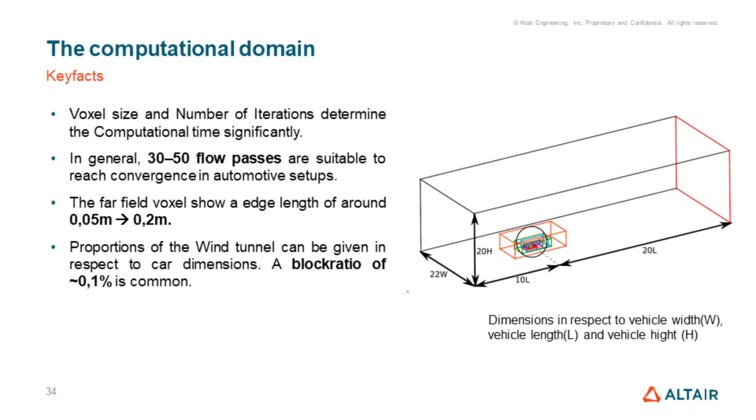Before I was at Altair, when I was at uni doing my bachelor thesis, I spent quite a lot of time looking into scientific papers and studying Ultra. Now we should have the slide coming up directly here, and we can look again at the dimensions - the 22 width and 20 height, and all those are the results of my bachelor thesis, which I did at the Institute of Computational Fluid Dynamics.

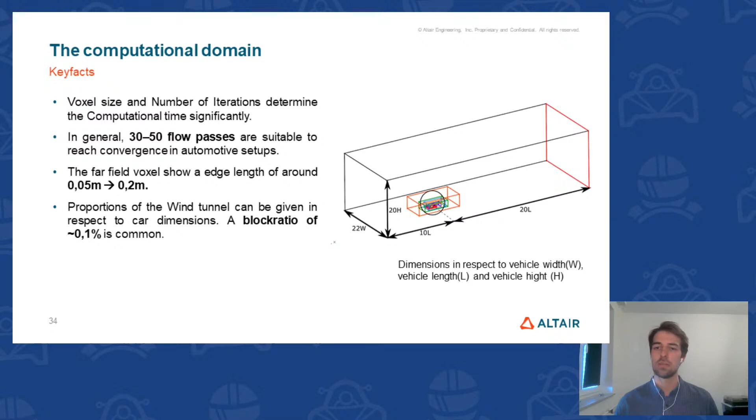It was half a year of work. We had some wind tunnel experiments, and I worked quite scientifically to get these optimum dimensions. They're just my own - I think they're not scientifically proven, but I think they work really well, so it's kind of my own opinion on this, that's the story behind it. I think you should also try to alternate them - if you'd like to get a bit more efficient, just shorten them up, and you should get a feeling for that.

Okay, and another question on the software: can I do thermal analysis or even water cooling with this software?

That's interesting, because I think the same applies to Formula Student - we had that point as well, where we had cooling systems and wanted to set up a whole simulation with CFD covering thermal effects too. I have to point out, sadly, there is no option in UltraFluidX. UltraFluidX is only capable of simulating external aerodynamics, but in a really accurate and transient way. If you'd like to do more on the thermal part, you should definitely have a look at AcuSolve, also an Altair solution, which is capable of CFD-enabled structural simulations and, of course, plugged-in thermal simulations.

Okay, thank you, and last but not least, a question that's probably related to many of us: is the software available in other languages? Oh yeah, of course, I can directly point this out.

I never went through the whole list of languages you can select when installing it. I know there's German and English - that's what I use - but there's also French, and I think you'll find what you need.